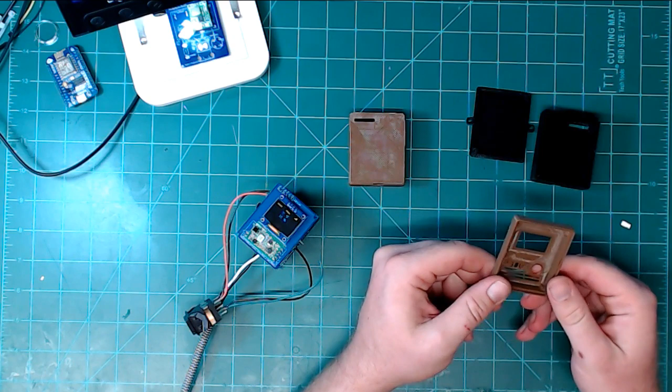I was thinking of doing this with you guys live, just so you can see how I work on this cube, and kind of see what goes into it.

Zombo brought up an idea, or kind of a concern, with these OLED screens, the way these pins stick out. They hit, and the display doesn't necessarily sit flush with the enclosure. So I'm gonna make a little pocket here on top of the display, just to let the pins sit in it and get the display more flush with the enclosure.

And then I need to make a few changes to the ADIO enclosure. So let me show you this stuff while I'm talking about it. Let's see.

So this is Fusion, right? Okay, yeah, this is the power supply enclosure. So I haven't added the tabs here, on the top and bottom walls yet. Yeah, I think that should be fine.

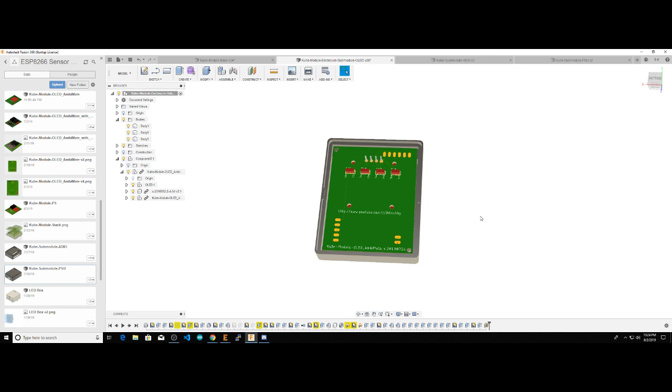This is the OLED enclosure, OLED and motion sensor, and you can kind of see inside there the 4 pins will hit up against the top of the enclosure. So I'm gonna make a little pocket to remove that, like right there, and then add the 2 notches on the top and bottom as well.

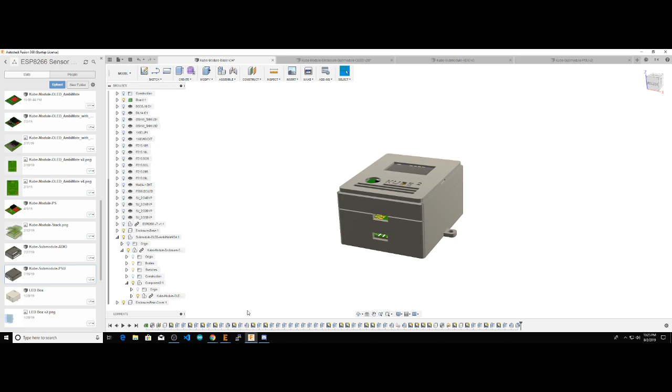And then with this, let's see, this is the base module with the OLED snapped on top. So these 3 STLs are already done, I think I've already posted them to my GitHub. Let's see.

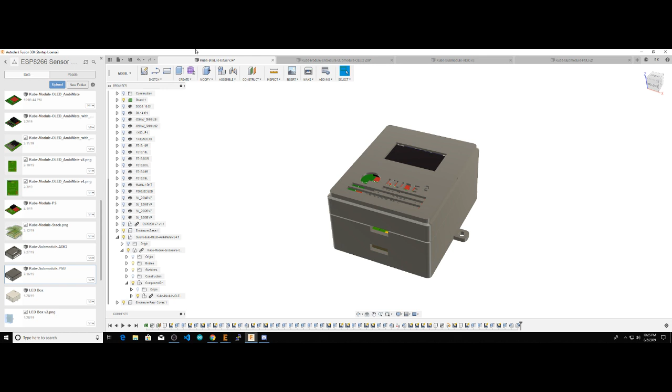But as far as the ADIO module, this is the analog and digital I/O. Let me show you back on the screen where we take this board apart. I should power it off too, since I have AC running into this thing.

This is the ADIO module, and the thing I didn't think of at first is I have the digital I/O pins running down the side here, the analog with 4 channels of analog running on this side, and then ground and 5 volt terminals. The issue is running 16 pins of terminal blocks here with these 4-pin terminals isn't ideal, because you can't really fit these side by side. You can fit up to 2 side by side, but beyond that they get squished together, so it's hard to fit them.

So I've already made this change to the actual PCB. Let me bring that up on the screen. So this is Eagle, and this is the board itself.

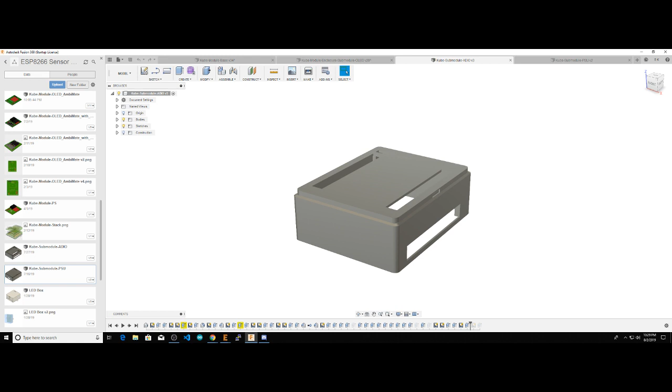When I was designing the board, I hadn't thought of the enclosure for it yet, and then when I was working on the enclosure, I didn't realize that by having all the terminal blocks in one single group, you end up with, the way this is printed, you know this is the bottom, you end up with a very long bridge here, so that's not ideal. I haven't even printed this, so I don't think this would be possible to print the way it is right now.

So we're gonna make modifications to add a little column here, and that's basically where the spacing comes in. That spacing will allow us to add the column without blocking any of the terminals.

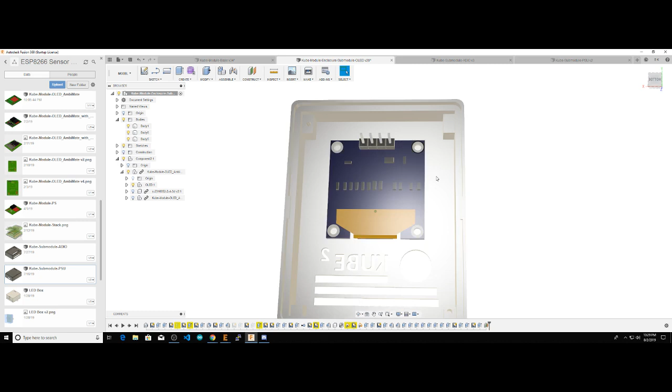Cool. All right, so let's go back to Fusion, and let's start with the easier task, I guess, making a pocket for the pins in the OLED.

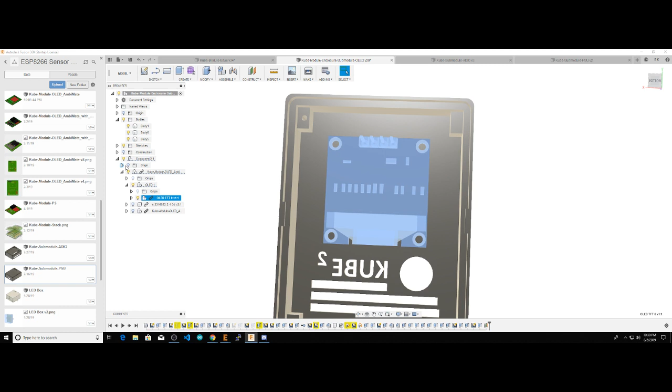So actually, I'll keep the OLED up here so I can use it. Let's see, I don't really need the whole thing. Actually, let's start back from this. Start a sketch. And maybe I didn't need to see that. Well, my keyboard back here.

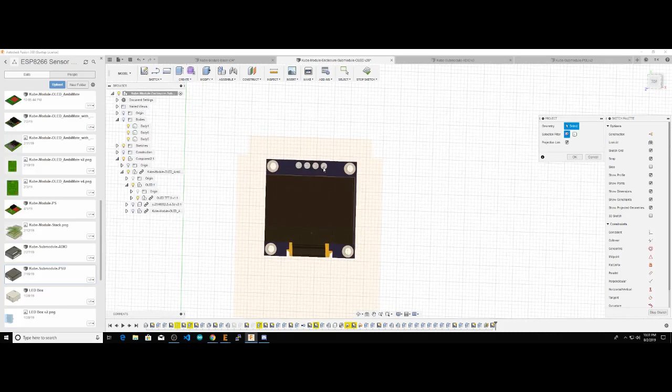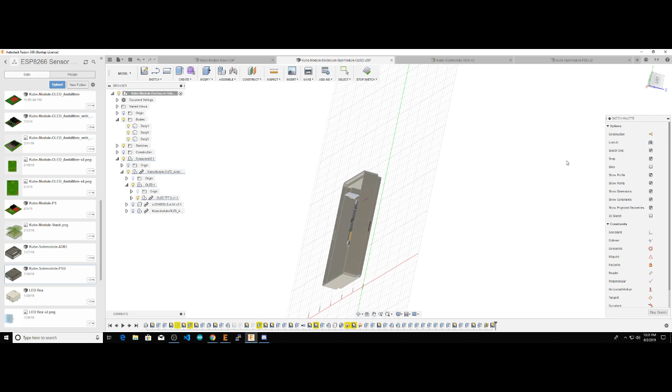I'm going to project from the OLED. Yeah, this kind of sucks, you have to remove everything. Alright, so we'll project from the actual pins onto our sketch. Okay, now we're going to remove the OLED again, and I have the pins projected onto it.

So now I'll just create a simple square. You guys are thinking it's not that long. Okay, yeah, I think that's probably not too long, depends on what temperatures people print at. I just figured it would be easier grouping them into two separate groups. With the terminal block spacing alone, I think it'll help.

So let's figure this out. I don't really have my measurements on here, but let's just figure on 3 millimeters and 12 millimeters, and then all we need to do is set this off a little bit. Let's see, we'll do a dimension here.

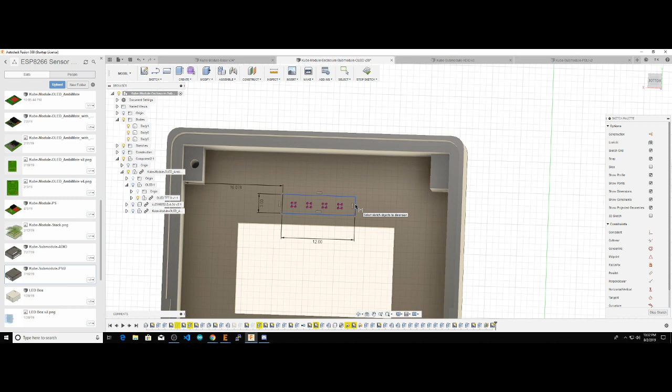Whatever that is, and then we'll do another dimension. I basically want to constrain this at 15.72. Okay, so I'll even it out. Of course, now this is a driven dimension. This is the problem with me in Fusion, I end up kind of dredging through it.

Part of me didn't want to make this a live stream because I'm probably gonna end up screaming at my computer at some point here, but hopefully that doesn't happen. So let's see.

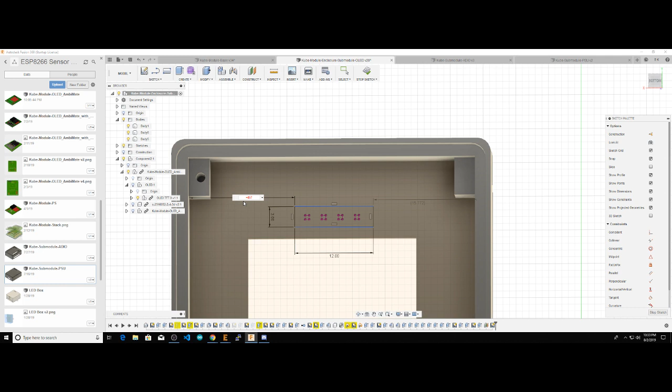I'd like to make it even with the driven dimension, but I can't do that because it's a driven dimension. So okay, all right, well I'll do something simpler. I'll just take the full dimension here. Yep, that's a driven dimension, I get it. And then use the hammer instead of screaming. That only works once.

4385. Okay, so why is this? Okay, minus D55, right? Minus D55, which is a 12 millimeter dimension, divided by 2. That's what we want to do.

No, that's entirely not what I wanted to do. 4385 is a total. I want to take the width of the pocket here, D54. Oh, D54, not D55, that's why. That's better, okay.

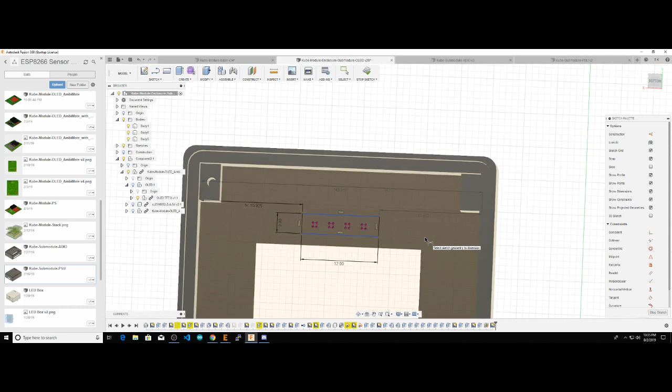For the spacing between this pocket and the OLED screen, I'll just take a quick measurement. On the actual OLED it's like 1 millimeter, so we'll do it like 0.5 millimeter. So we'll space it 0.5 millimeter away here. And that should be fine, except it's not.

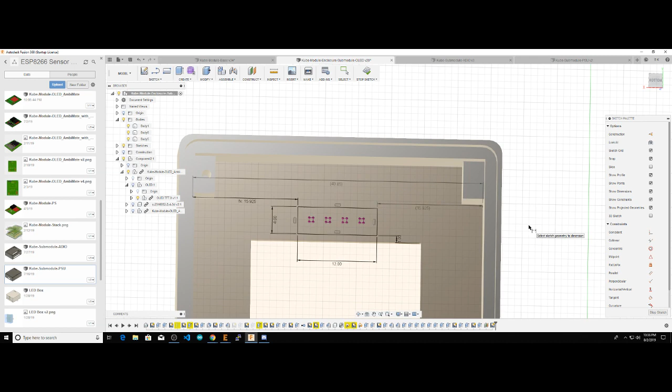Alright, so I guess let's try 1, and we'll just make this a little bit wider. Yep, that's better. Alright, so that pocket should be good enough to fit the pins and the solder and make the OLED a little more flush.

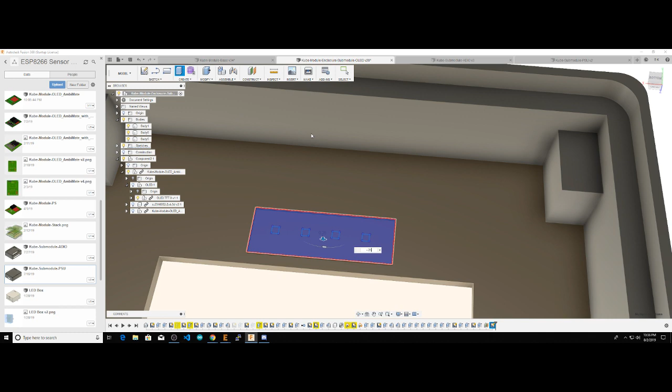Alright, so stop the sketch now, and I know I have about 0.5 millimeter width here, so I'll just take this hole. Actually, I guess I gotta select all these. Create, and we'll do 1/4 millimeter inset. And I think that's not enough, so let me fix that. Let me do 0.5 millimeter.

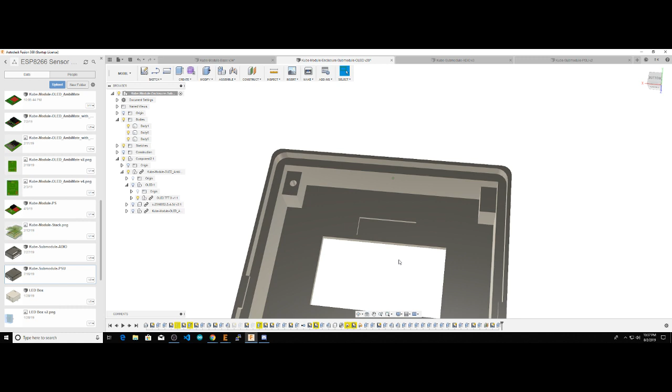Cool, so that's basically it, right? So that was one of the things that Zombu wanted me to fix with this thing. So there it is.

And I guess the next thing I want to do is add these notches right here to the wall here. I know I did this already, so I'm not gonna do this twice. So let's think, I already had all the measurements on sketches here. Whoa, that's not right.

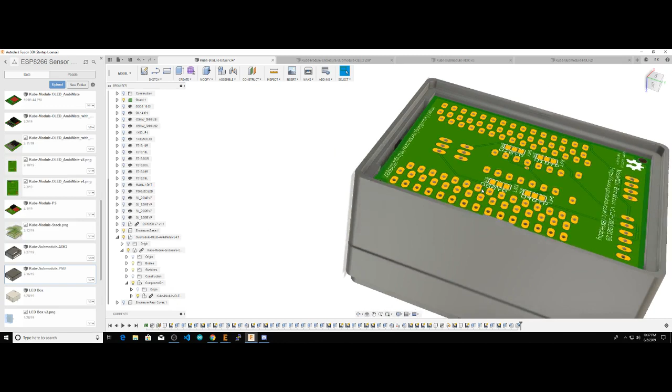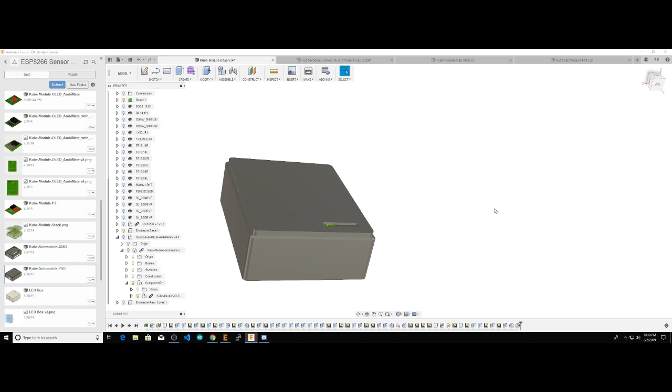One second. Did I not save this? Well, that sucks. I thought I already saved this before, because I know I did this to the base module already.

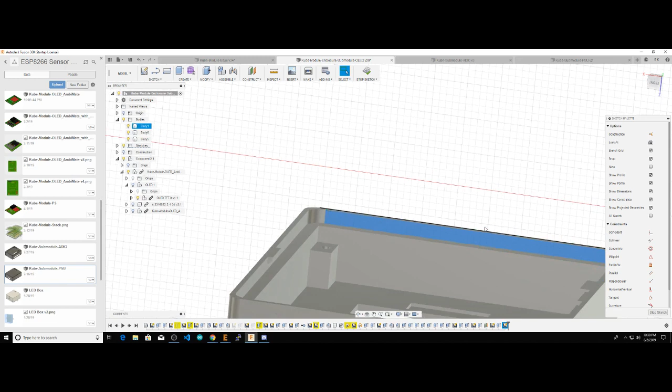Alright, well, we're going to do it to the OLED right now. So again, same thing, I want to create the sketch. And really, let me think about this. I wanted to copy this side here to this side, but because I don't know of an easy way to do that, I'll just create the geometry again from scratch.

I think it's 1mm, and I think I actually have these already defined. Yep, I already have these defined. So notch width, can't spell today, and notch length.

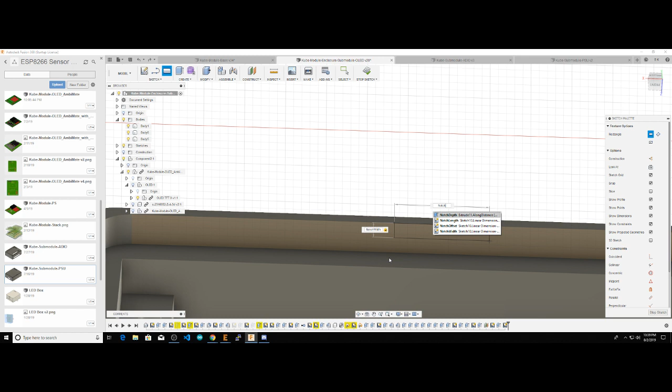Except that I screwed up because I did the wrong side of the wall. Here we go. Alright, notch width. Cool, and then...

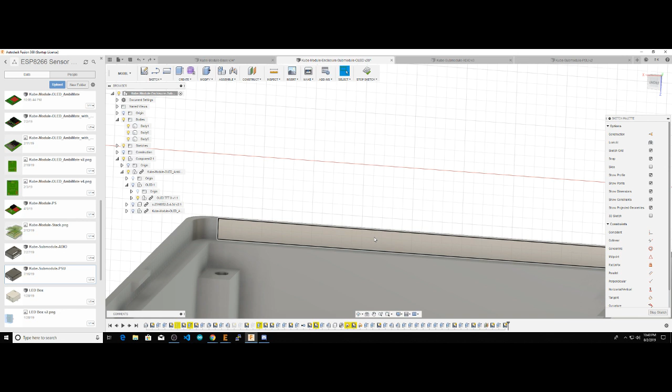Alright, let's try this again. We're gonna get through this tonight, maybe. I didn't really have a plan for how long I was gonna go, so you guys have stuck with me for a while. Alright, good now.

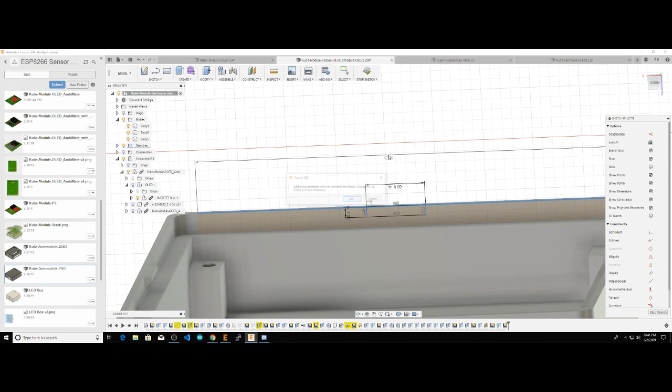D, again, this is a fixed D62. Okay, so D62, and we'll do the same thing where first I'll just do a dimension. Okay, yep, 4285, just to give myself a measuring dimension here, and this will be our driven dimension. So it'll be 4285, actually, 4285 minus D.

I already forgot it, what was it? 60? 62. Divided by 2. Alright, so it's centered now.

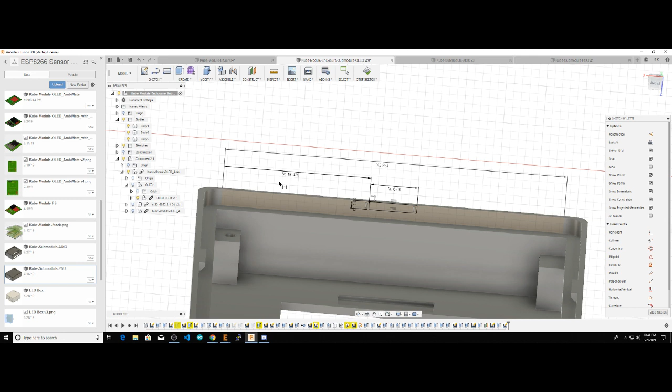And I'll stop the sketch and create another one on this side. Where is it, okay. P, project, and I'll project the walls of this square just so it's easier. And now I'll just create another rectangle, I guess, with these dimensions over the projected points. So...

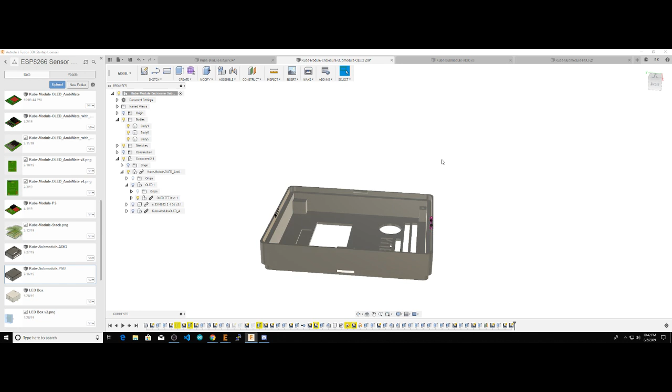Got that done, and now I think I need to do... I can't do both of these at once, so I need to extrude one, and we'll do notch depth, except it's negative in this case.

And actually that didn't go as far as I wanted it to. I think it's okay, so that dimension is wrong. I think I have a negative 0.5. Nope, 0.5.

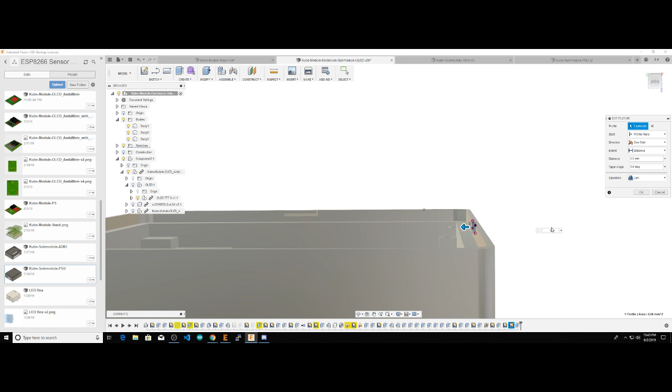That looks better, I think that's what it is. Nah, actually I think I know what it is, it's 1. 1mm, yep, there we go. That looks a little bit better.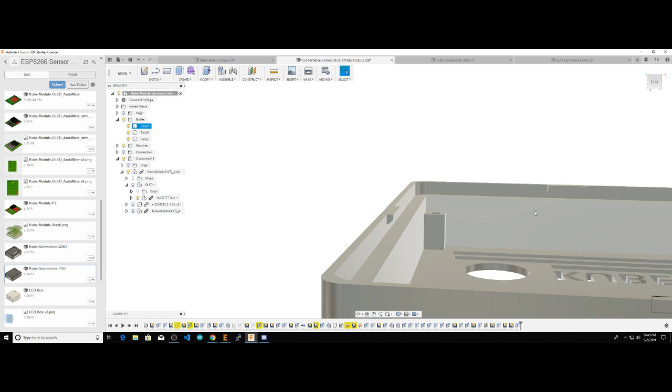All right, we'll do the same on this side. One millimeter out. All I need to do for the notch is... chamfer, that's the word. Need to chamfer these edges so it's printable and doesn't overhang. So we'll modify this chamfer, and it's just 0.5 millimeters from what I remember.

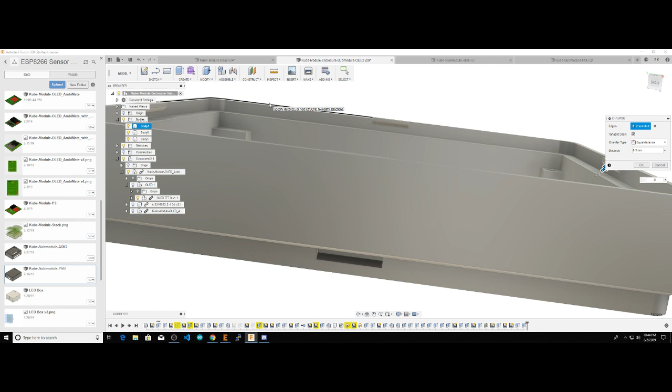That's it. So those are my tabs for snapping this module onto the base with, on all four sides basically.

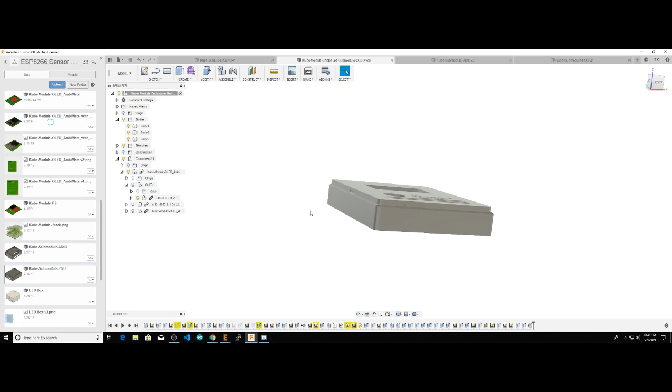I think that's all. Is there anything else we needed to do to this? Can you remind me? I think we wanted to do a pocket for the pins and four notches on all four sides. I think that was everything. Let me save this time in case I didn't. Technically I should do the pocket.

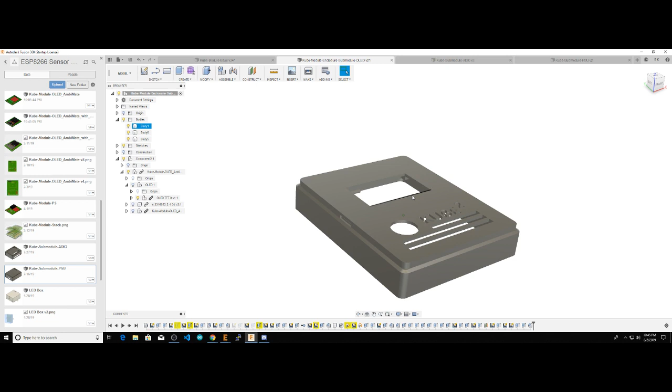The notch - the way these modules snap together is you have the notch on this internal wall, and then the pocket on the external wall of the module below it. But really the OLED display is going to be on top always, so you're not going to need that, unless at some point I do a fascia or some sort of snap-on piece just to make this wall even.

So why is there a notch on the... oh yeah, right, you're asking the right questions. I think I just explained that.

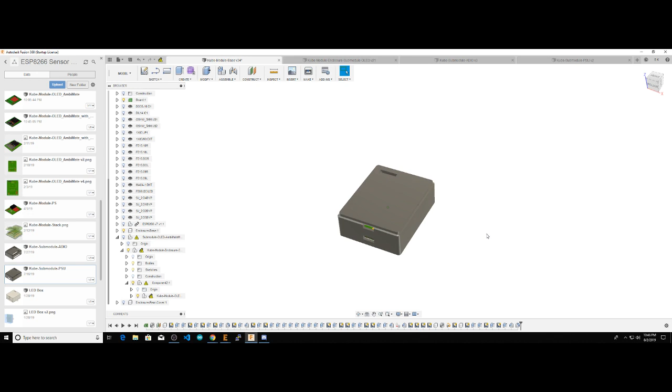I might want to just do a simple ring basically, and once the whole cube stack is set up, like once you have all these modules put together, might want to have like a... this kind of looks cool too, but you might want to just finish it off with another ring around here to snap it in place. A frame would be nice, okay, or just remove the edge. Yeah, either way, I think we can play with different designs.

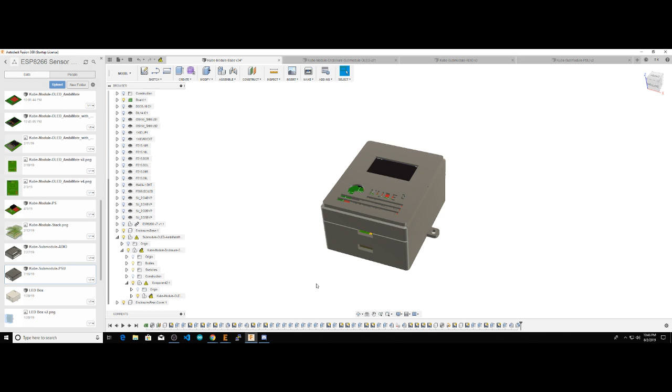Like I said, I'm making all these designs open source, so everything is in GitHub. I'll probably make a blank module as well, so like with Eagle, it'll just be basically the board itself and the header, and then whatever people want to put on the actual board, that's up to them. I'll put that in GitHub as well at some point, and then you can build different enclosures around it. I think this is just the standard one I designed for it.

It's the top piece, you don't need it. You're right, it won't. I kind of like the edge though, I think here it's kind of... I think I prefer it, but who knows.

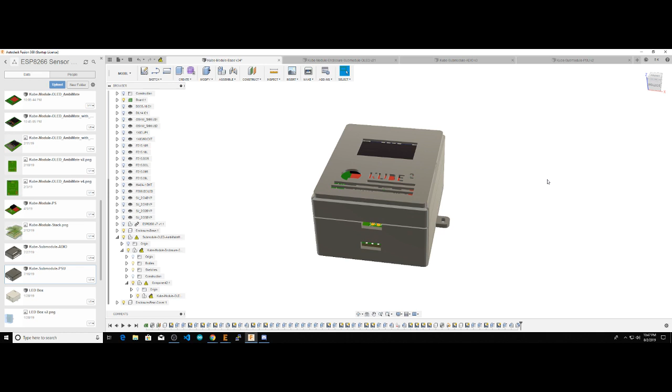So I think that was it for the OLED screen, and let me just double check. Okay, I saved it. All right, let's move on. Actually, all right, so PSU module, pretty simple.

Same idea - I'm gonna need to add notches here, so I'll do that later on, and just the tabs here as well. The edge is going to impact printability. If anything, it should be a 45-degree chamfer.

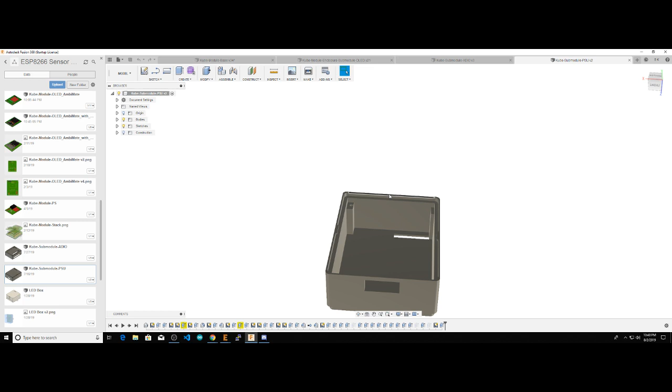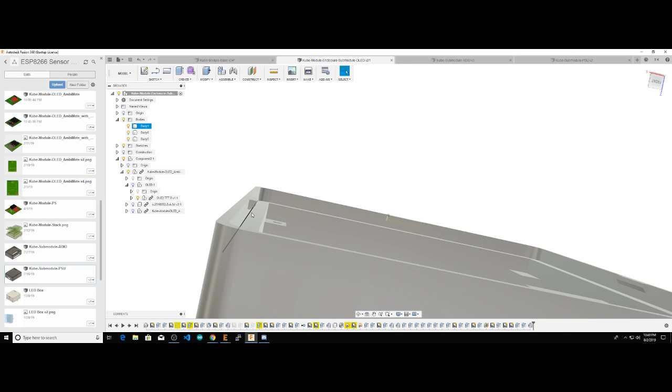Which edge are you talking about? Presumably the edges now? No, oh, you mean just this little piece right here, Luma? Like that piece right there? Guess it really is an overhang, huh? I didn't even think of that. At some point in this design I made these walls a little thinner, and that moved the sketch face, the outside that faces the user.

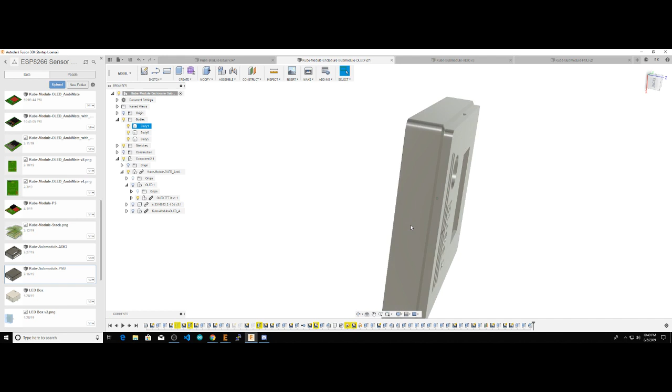No, that's a chamfer too. So the print's fine - perimeter of the face. Oh, it's gonna be printed this side down, right? So where do you see the overhang? Oh, this thing.

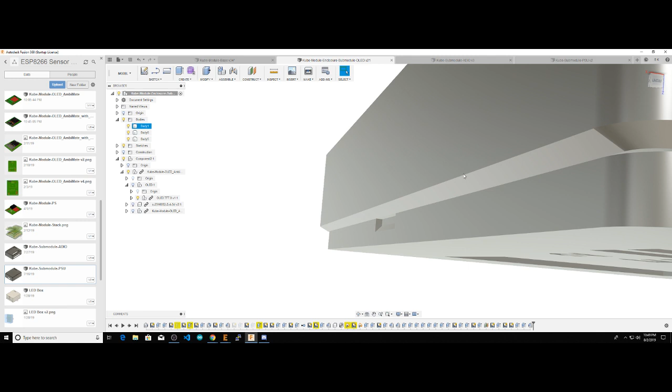Oh yeah, okay, this is what you were talking about right here. Yep, it's definitely chamfered already. It's a pretty high angle chamfer, but it should be fine - I mean it is fine, from what I've printed. Cool, no worries man, thanks for looking out for this. That's good.

What else we got? All right, ADIO module. So for this one, I already had... like I was saying, I want to add just a little notch here to make it a little more printable.

You just hate supports, it's a war on supports. Prints with no issues, just print one. Okay, all right, so you guys don't want me to change this? You guys want me to leave it the way it is? You think that's cool? I mean, if Zambu printed it - Zambu is a 3D printing magician - but I'm thinking of the little people like myself that might not have 14 printers with extreme precision in my shed, in my workshop.

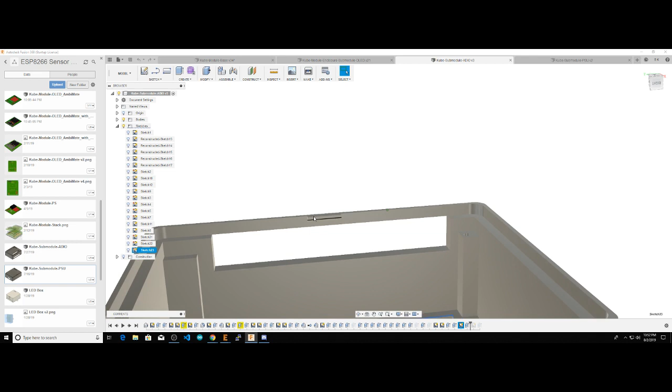Oh, now you're saying I need to put a pillar in. That's the whole thing I was trying to tell you guys. I put a grouping here. Might be an issue with the clips. These things, you mean? What are you thinking? It will bend. Yeah, it might bend a little bit. I guess we'll see. You know what? Let's do this. Let me extend this out a little bit, and then we'll basically see what happens. You clip and you might break the thing. Yeah.

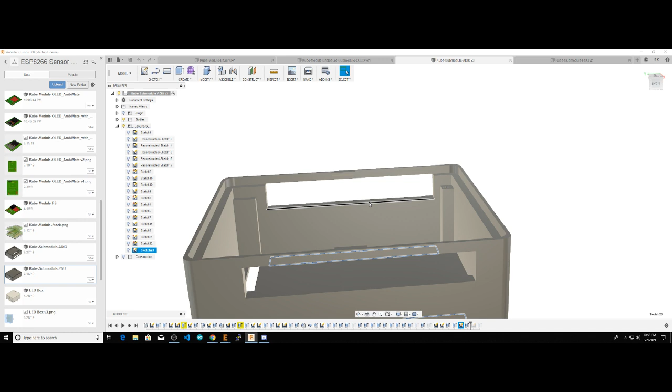But what do we do about Luma? He hates supports. I'm just trying to keep the man happy. He designed the hasp, and he's one of the good guys. So we got to keep Luma happy. I mean, it's not a support, but you can explain that to Luma. You gotta convince him. It is a cover for the gap. You're right.

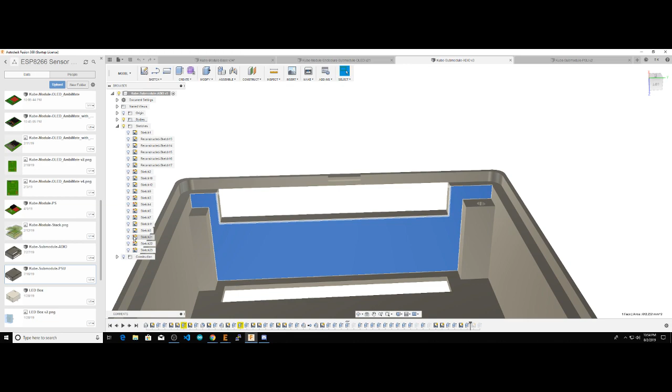All right. Well, just to keep things going here, let me go in and fix this notch here, this cutout here. So it's 43 millimeters long right now. That's why I was concerned about bridging, but you guys don't seem to think that's an issue. 43, and it's 8 millimeters away from the wall. So I think I need to do, well, let's see.

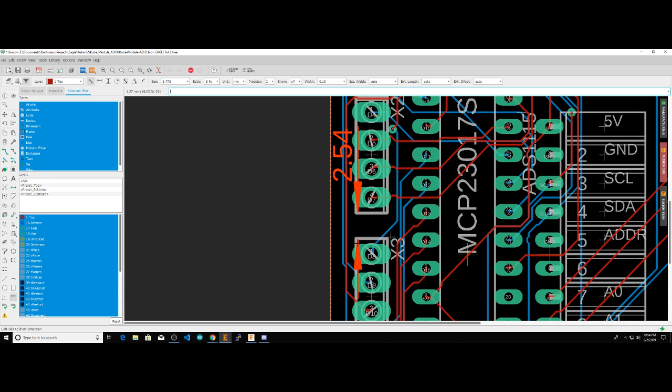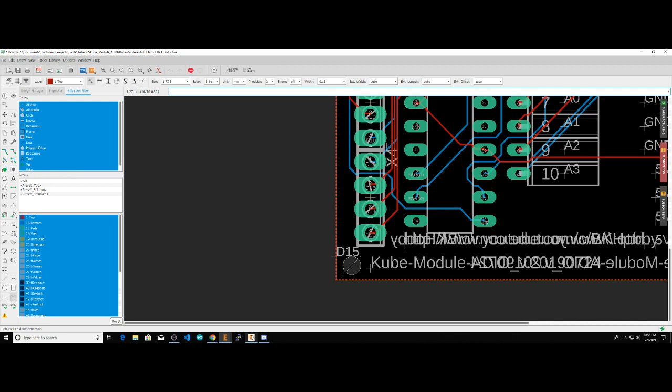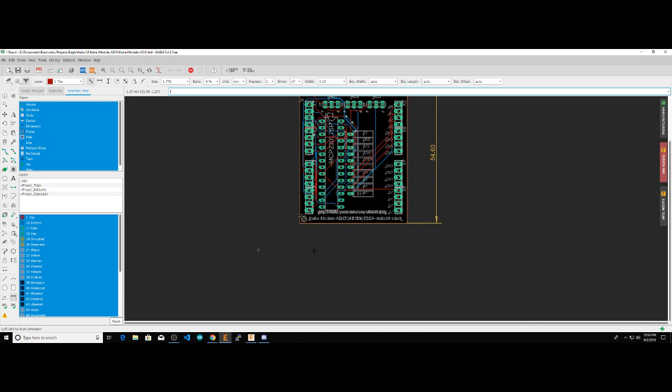43 millimeters long, and the grouping of these is 20.32. Okay, so all right, let's try this. Let's try making a, I almost called it support, let's try to make a cover. So it's 6 millimeters, and this is going to be 2.5, and then we'll dimension it.

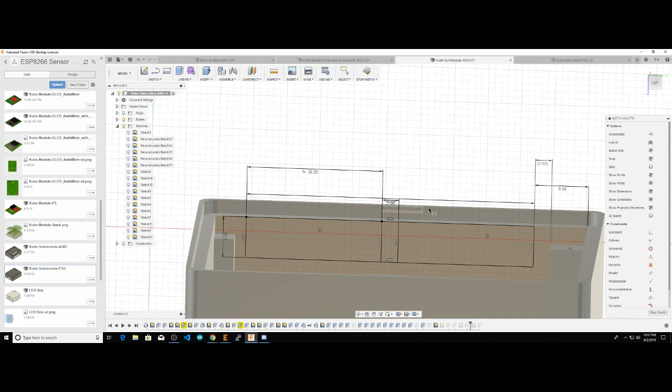Was it 20.3? Right? Actually, let's just do this. Let's do 43. This is not a driven dimension, so what is it? D11 minus this dimension, which is D29, divided by 2. All right, and that gives me enough constraints. The cover falls right underneath the notch, so I think that's still okay. Does not fall on. What am I saying? You guys know what I'm saying.

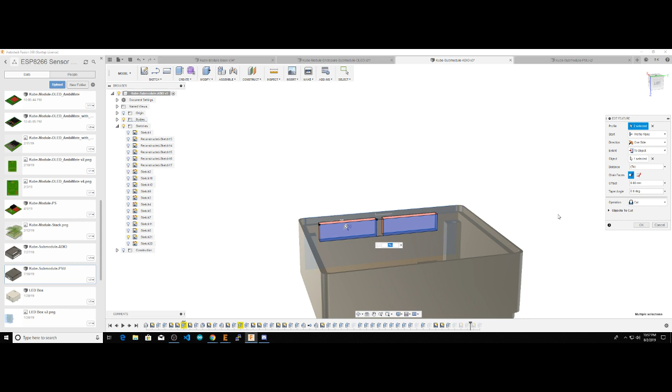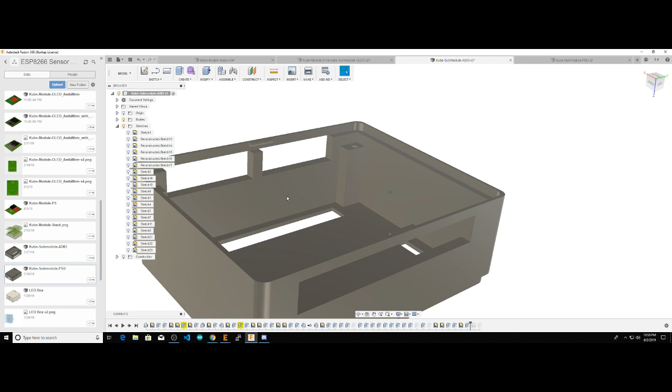Now I gotta find the right one for the one we just changed. Edit feature. So we basically deselect that thing we just made. Hit OK, and now we have a nice cover. Right? I think I like that. I think that'll break up the grouping nicely and cover it. I kind of think the way these terminal blocks fit on the board, that might be too wide, so I think I'll still extrude it and basically make this as thick as the wall here. So let's do that.

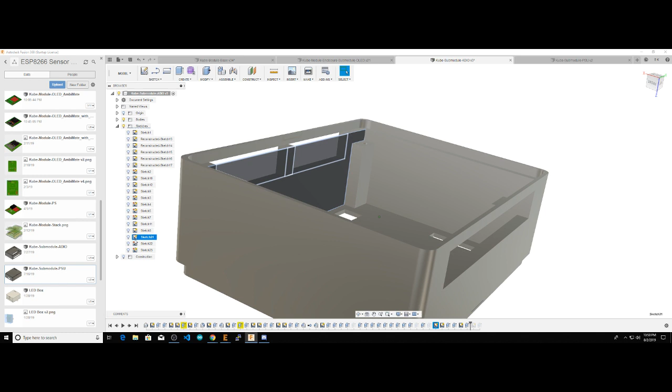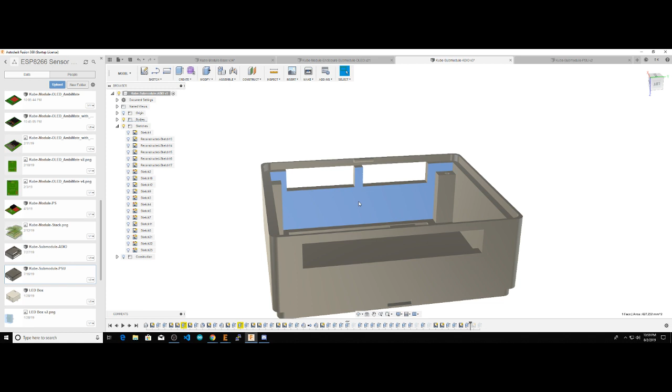Bring that sketch up again. Except it's already been used, so I need to recreate it. Whoa. Oh, it's just that this is not a constraint. So let's make it collinear with this guy. There. It should fix it. Maybe. Is it because I'm using it in a different extrude already? Okay. Well, in that case, I'm not using a different extrude. I just took it away from this guy.

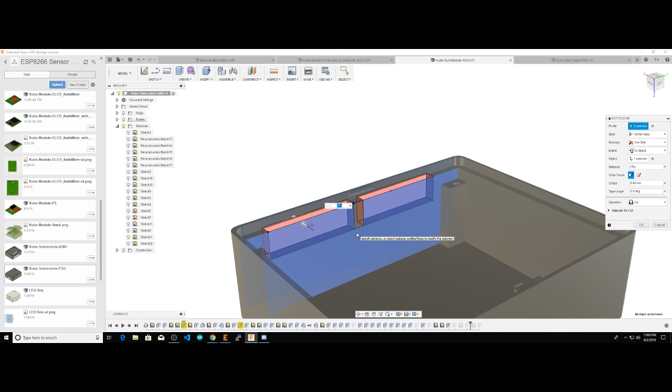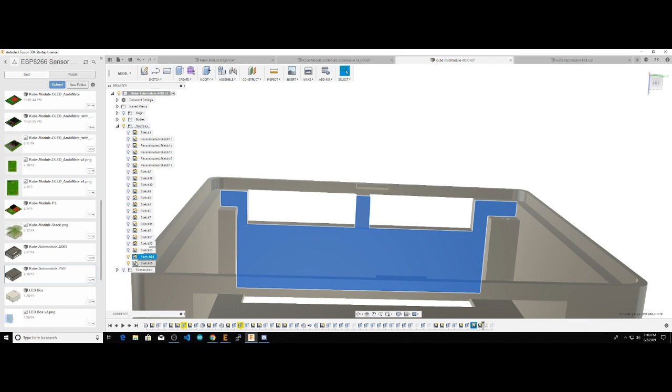Alright, well, I'll just create another one. No problem. Another sketch on this wall. Nope, that's not one of them. Is it? Yep, it is. Okay. So we'll just create another square here, from here to here. It's not constrained, is it? Actually, that's not even right. Okay. Let's fix that.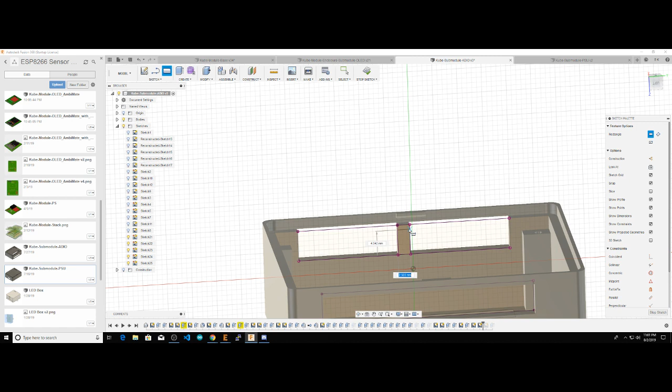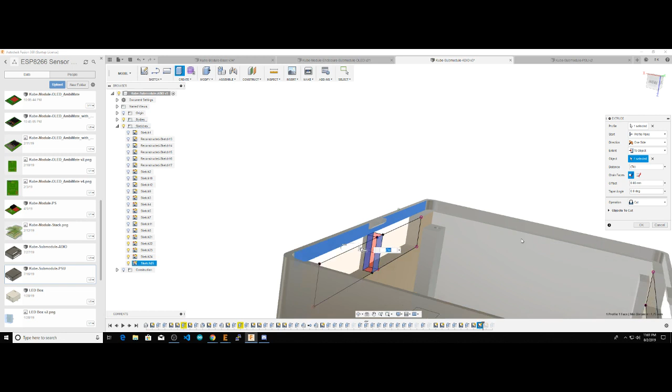Let's see if I can do a project. So, sketch 23, no, sketch 22. Which one do I want to see? Here we go. Okay. All right. Now we're talking. So I want to extrude this to object to this wall right here. And I will cut away that piece right there while still providing cover. Alright, so now get rid of these sketches. And I think that's the final layout.

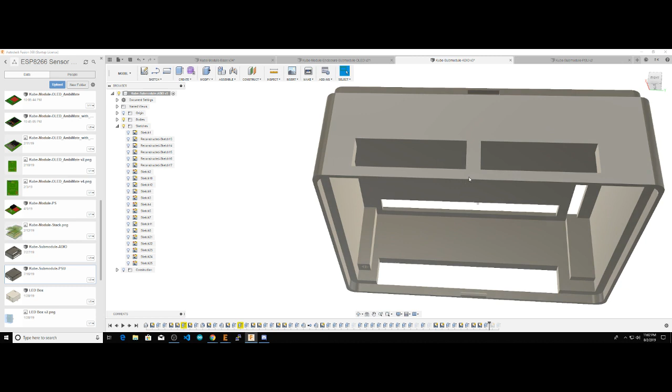I'll still let the board sit here, flush with the top wall right here, and it will allow the terminal blocks to basically fit through the openings, and the cover will cover that gap. So I think I'm good with that. So you just gotta repeat this on the other side. And I think, let's see, so that was a sketch I already had here. Yep. Okay.

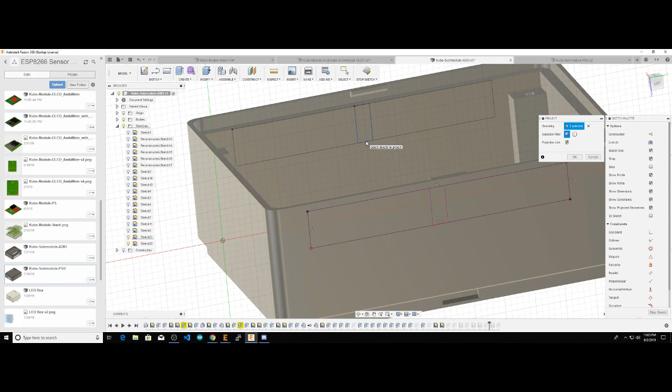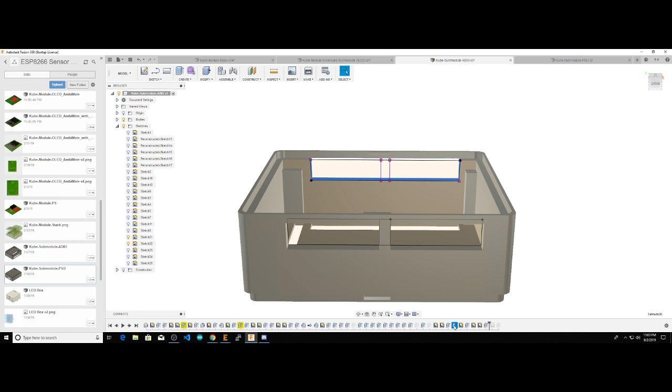I'll just redo this sketch, and because it's on opposite sides, I can just project from this guy. This. No, let me try this. I don't think I even have to, yep, good. I never even had to create the square, so just try and think of ways to make this a little quicker. So remove that, and I still think I need to create a new sketch to be able to reuse that piece.

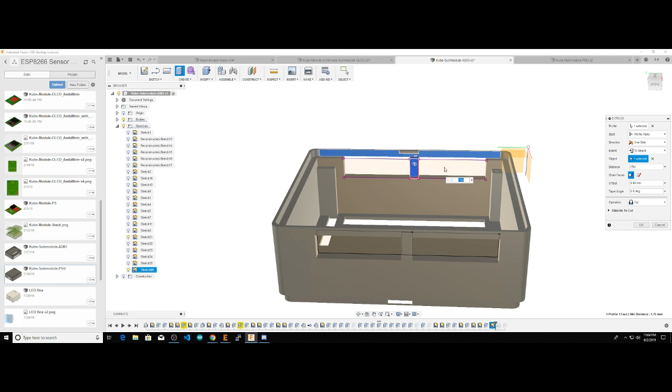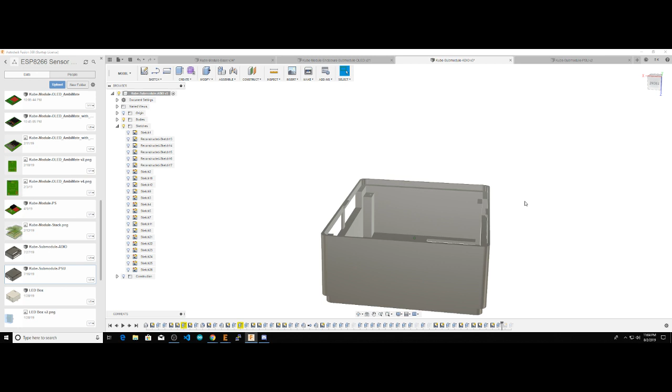So we'll project those 4 lines right there. Stop the sketch and extrude to object to the wall. And that's it. So clear the sketches and we're pretty much done. Cool. So I still have to do the notches here. I need to do the opposite side, basically do inset notches on this side. But I think that's pretty good. I think I'm pretty happy with that.

So let me finish this off, I guess. I'll finish this all offline. Don't want to bore you guys with details. But I think after this is done, after I have these STLs created, I'm pretty much done with the prototype as far as the 3D modeling and the board design. So

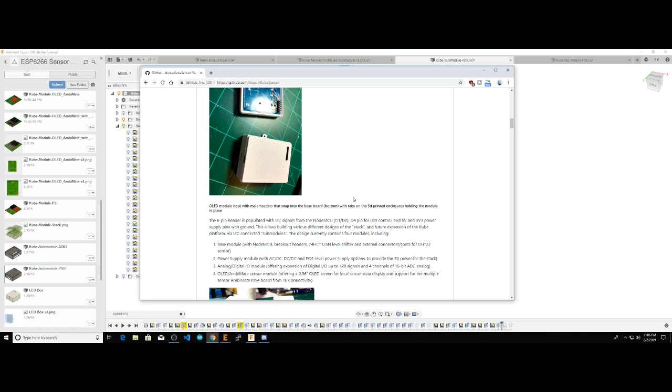Share it. That helps too, because I think the whole point of this is to create not just a sensor, but more of a platform for sensors, right? So I think Zombo has ideas. We've already talked about all kinds of things. And I think there's potential for this to create cool modular designs, and I'm kind of excited to see where people take this.

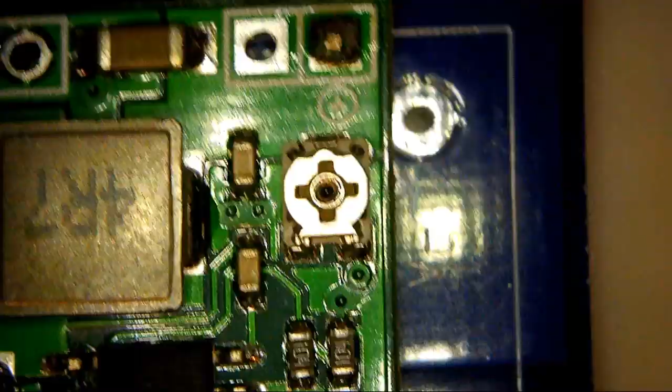And that's it. So yeah, Zombo wants to see the microscope. Okay, I can do that. I got it set up. It's actually pretty cool. So can you guys see that? Definitely like this thing. It's got really good resolution, and it's not that slow, I guess. Like Zombo was saying, it's a little laggy when it's connected to PC, but I haven't really noticed that myself. It's good enough for what I need, and I can show you guys the boards from really up close, so that's cool too.

This is the power supply board, and then this is the, let's see if I can focus that in a bit. This is the ADIO module, so terminal blocks, the MCP expander, the ADS 1115. Yep, really cool. I think I like this thing. Gotta try to use it more in videos and stuff, but yeah.

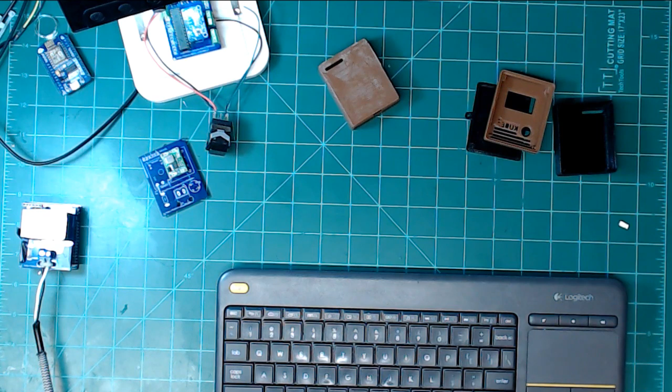Cool. So just about an hour, I guess 15 minutes. I'm gonna probably cut it short here. Oh yeah, it was definitely dirt cheap. It was like $50. You're right. So I'm gonna cut it short here just so I can spend the next few minutes screaming at my computer in the privacy of my own workshop here. I'm kind of glad I was able to control myself with the things you saw me doing. And yeah,